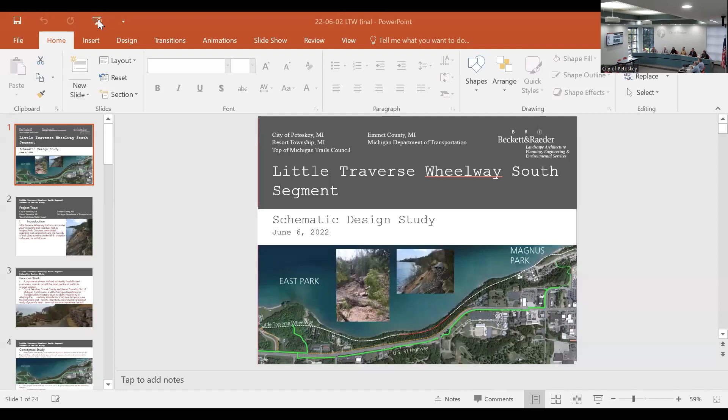Next is a presentation where we're going to hear from Beckett and Raeder concerning the Little Traverse Wheelway West Side Connector schematic design. For that, I'm going to turn it over to City Manager Al Terry. Sure, and I'll turn it over to Kendall Klingel-Smith, Parks and Rec Director, and he can start the program off, and I'm sure he'll introduce Tim Knutson from Beckett and Raeder. Well, thanks.

As you know, this has been a process that we've been going through for the last several years. In 2019, we noticed some fissures along the wheelway that we monitored in the fall. And then in April of 2020, we had the bluff collapse. We have done other studies with Baird and Associates, more of a slope failure study, to try to understand what happened.

And so we've gone through the process with the county and with Resort Township. The last assignment was to have Beckett and Raeder come up with engineer drawings and an opinion of probable costs for a route on the south side of 31. This route was identified for a few reasons. There is some trepidation to put any infrastructure back on bluffs, and that's a statewide trend we're seeing. So we wanted to have an option to explore, and we were directed by our elected officials to review this option on the south side of US 31. There's been a lot of discussion, a lot of meetings, and a lot of reasons why what you're going to see tonight is where we are.

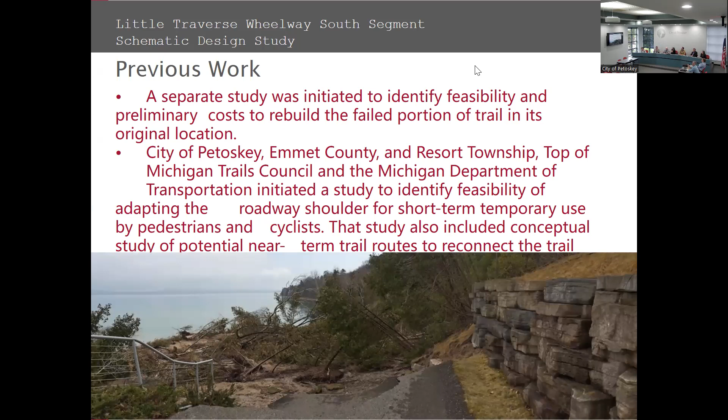So this is where this all began. We were trying to find a route in 2020, or as quickly as we could, by modifying the roadway shoulder in some fashion. During that study, we learned that the road shoulder cannot be used formally for pedestrian use. It can be used for cyclist use, but there are dimensional requirements that a road shoulder falls short of when you try to assign it to pedestrian use.

Some of those requirements get to accessibility standards, and some get to AASHTO requirements, but they all refer to safety. So we took that warning very loud and clear from MDOT that there's really no possibility to accommodate pedestrian traffic on a road shoulder.

So we moved into this study. We wanted to look at any trail we could place in an efficient manner to reconnect the wheelway from west to east around that failure. The failure section shown in the slide is the dashed red line in the very center, and the dashed white line is the wheelway.

Finding that route efficiently meant either using the route along the lake, which is covered in a separate study, or making use of the US 31 highway right-of-way to accommodate a portion or all of that trail. On the north side of the highway there's an orange dashed line representing the north US 31 highway trail route we explored.

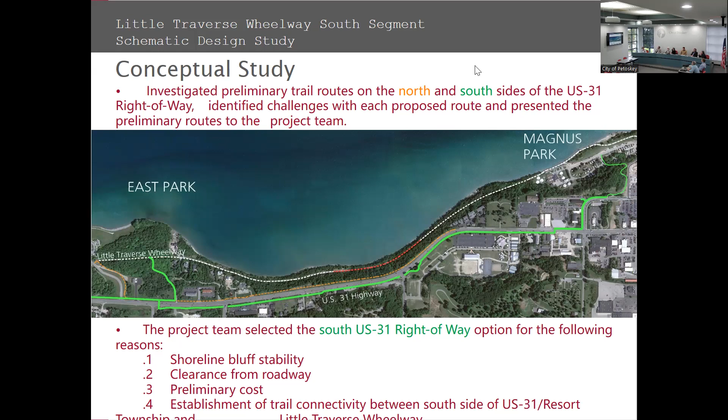One other factor that pushed us to that decision was that we would establish trail connectivity between the south side of US 31, Resort Township, and the Wheelway. So all of those businesses on the south side of 31 would have a pedestrian and cyclist connection to the Wheelway, which is a benefit. That was probably the last factor that played into the selection of this route.

So at this point, we dove into this study, which was a more detailed schematic design of what we're calling the south segment connector. So that included gathering topographic survey for the proposed trail segment, locating existing utilities within road rights of way, and making sure we consider utility replacement costs and schematic design. This was a pretty involved task, which meant getting in touch with the utility providers themselves and trying to get some mapping, type, size, location of existing utilities from them.

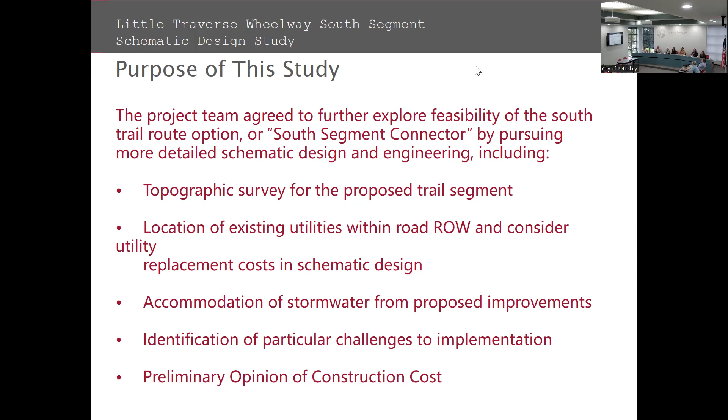We know if we modify the road shoulder to accommodate a trail, which is impervious pavement, we're going to have stormwater impacts. So we have to make sure we accommodate those stormwater impacts. And then lastly, we wanted to identify the particular challenges to implementation and most importantly, an opinion of construction cost.

So these are the design and engineering influences, or I guess guidelines and standards, that we attempted to meet. So these address minimum trail width, the distance the trail has to be from the roadway, the type of visual and tactile identification at intersections so that no matter what your ability is, you know that there's a crossing there. Clearance from the trail for trail users. We want to make sure we don't surpass steepnesses with regard to longitudinal, but also cross slopes and our crosswalk locations. I'll mention that a little bit more later.

AASHTO, which is the Guide for Development of Bicycle Facilities and the Guide for Planning, Design, and Operation of Pedestrian Facilities, were taken in combination as design standards for the trail. And then importantly, the Americans with Disabilities Act, which will identify our maximum cross slopes, our maximum longitudinal slopes, and other elements of the trail that have to be met to meet accessibility. And then lastly, adhering to MDOT's design and engineering standards, which also happen to include the AASHTO and the ADA accessibility guidelines.

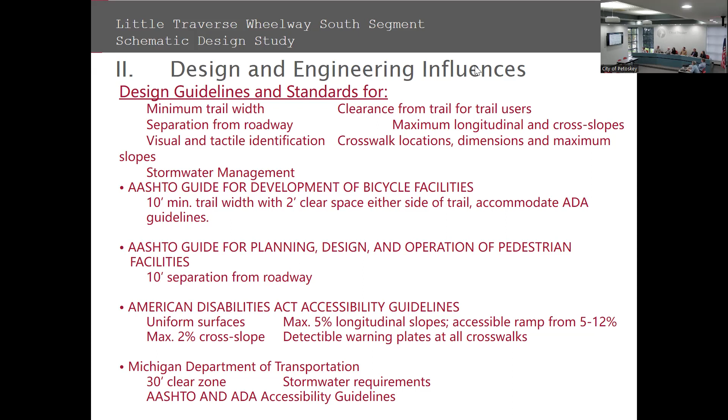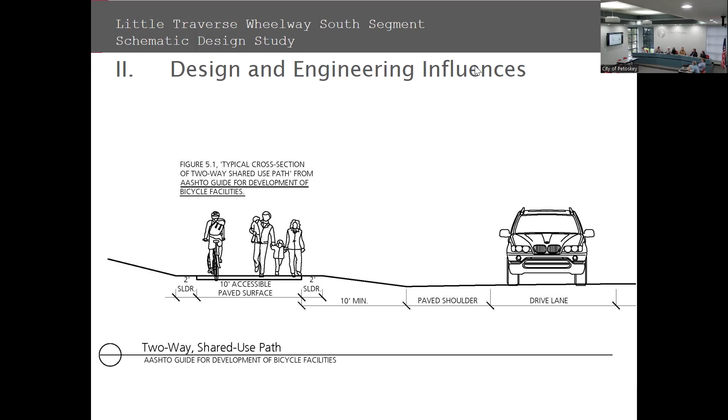So this is a really quick snapshot of what that trail looks like next to a roadway. So you can see the vehicle to the right is in the drive lane. Then we have a paved shoulder. Then we have a minimum 10 feet of separation from the edge of that pavement to the trail surface. Once we get to the trail surface, we have to have 10 feet of trail width, no greater than 2% cross slope, but also have to have a 2-foot shoulder on either side with no vertical obstruction. So for example, somebody can't catch a handlebar if they're cycling along that edge, if it's 2 feet clear space beyond the edge of the trail. So that's a quick picture of the guidelines we use.

So in the study, our next chapter was design narrative, and I'm not going to walk you through the narrative for all 8 sheets because that would be a pretty exhaustive exercise. But if you pick up the study, this will show you sort of a snapshot of what you'll see if you do. So we basically utilized the topo survey that we received in AutoCAD and designed to that plan. Pulled existing utilities in from utility providers, referred to previous MDOT construction drawings from 2015 and some regional GIS info, regional drainage patterns so that we get a grip on our stormwater impacts, and prepared a set of schematic design plans and representative cross sections.

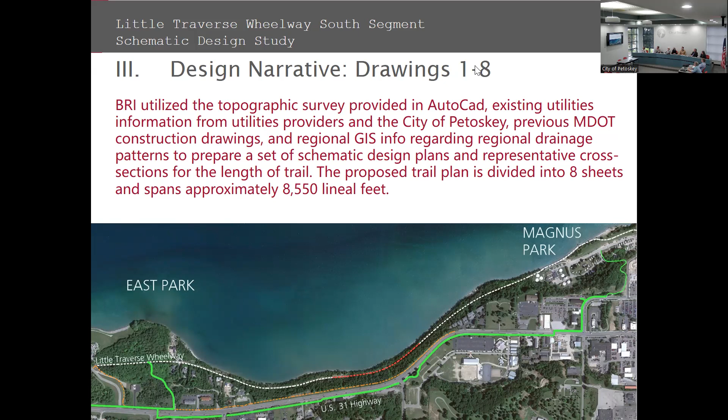So for that length of trail that you see in green, we ended up with 8 drawing sheets. Each drawing sheet had 2 sections of trail on it, so really 16 different sections of trail, and we're just identifying them 1 through 8. Each drawing in the design narrative gets its own page, and if we go to the next slide, we start out with an aerial vision of what that trail segment is. So this, for example, is trail segment 2. This will be the second trail segment from East Park. And the reason I chose to show this one to you is because this is where the proposed tunnel crossing would take place. This is the only location along the roadway where we have the difference in elevation between the base of the shoulder and the top of the road to pass a tunnel beneath that roadway.

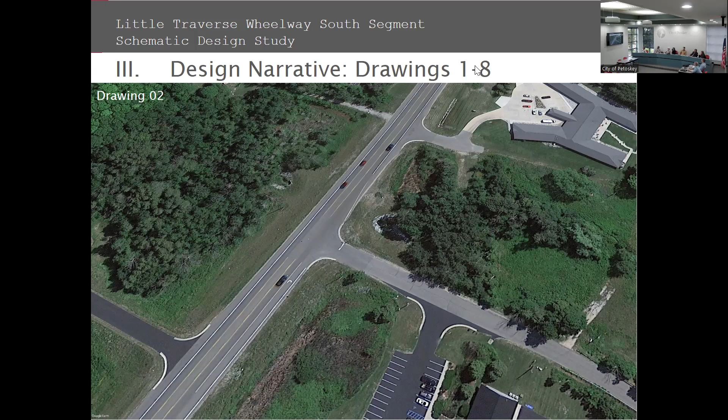So we start out the narrative with an aerial image to orient people with regard to where they're located. And then if you go to the next slide, excuse me, you should see the design narrative. And again, I won't take your time by reading all of this narrative. Some of them are longer than others, but at the bottom of the narrative, it also identifies the primary challenges with regard to that trail segment. So if we go to the next slide, there is our drawing sheet. I think I told you for each drawing, we have 2 sets of trails, top and bottom, but for this drawing, we showed it at a much larger scale and just showed 1 section of trail because we wanted to be able to show the tunnel crossing in more detail.

So if you're looking at the top left of the sheet, you would imagine yourself following that trail, which is bordered by those two heavy gray lines, and that would descend downhill in the form of a ramp till it reached tunnel elevation. You would make a right turn towards the road, pass underneath the tunnel. This tunnel is dimensioned to meet the same dimensions as the tunnel at Bayfront Park. Once you were underneath and cross the road, you would make a right turn, and then likewise progress uphill up a series of accessible ramps until you were back to sidewalk grade.

Now, there are a couple of other things happening in this slide that aren't maybe immediately apparent, but that really drive the cost and the complexity of this project, and particularly the tunnel. So really quickly, there are a number of utilities that pass through the site and through where the tunnel is. In other words, underneath the roadway, the most significant of which is an 18-inch water main. So we have to move that water main, but we know we have to move it outside the influence of the tunnel and the roadway.

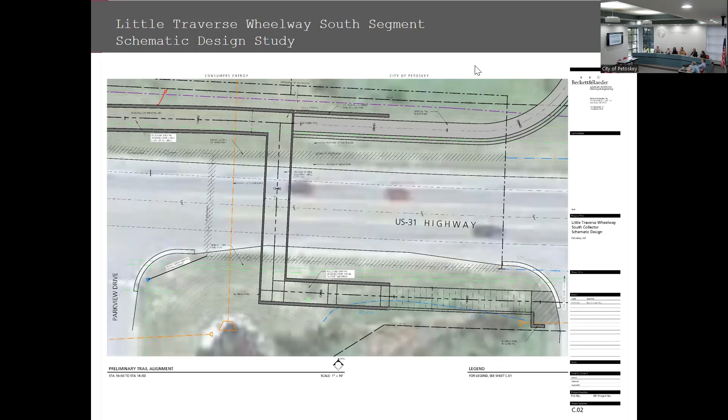So each drawing has at least one, and in many cases more than one, representative cross section that describes maybe more easily and more visually what the challenges are, whether it's this circumstance or a steep swale that we have to fill to place the trail, or maybe utilities that we have to move to place the trail. We had to cut sections like this to tell us what was going on and how to respond properly. So as I said, each drawing should have a set of representative sections going along with it.

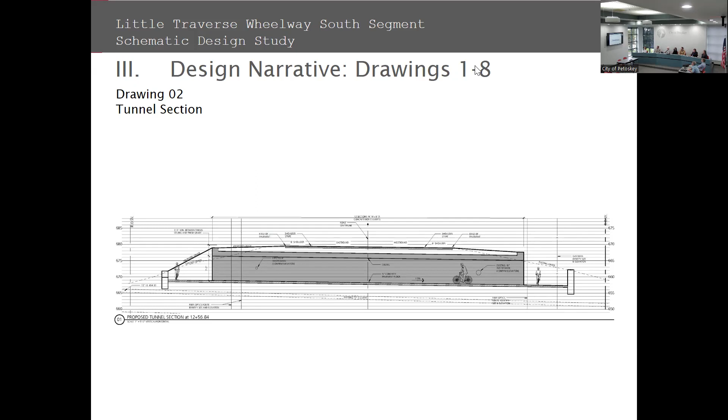So just a summary of design and engineering challenges we encountered, most of which we anticipated, mainly the tunnel crossing, the proposed retaining walls and clearance to roadway. We need to maintain 30 feet of clear zone. We have that in most places. There are one or two changes that we can make to make that happen everywhere. So that's not a big concern. We know we can get 3 feet 5-inch minimum depth of cover from the tunnel ceiling to the finished roadway grade. We've achieved that. We've protected that existing 72-inch storm sewer, which crosses the road just west of the tunnel location, from any impact. And we've proposed rerouting utilities over and under the tunnel and ramp structures.

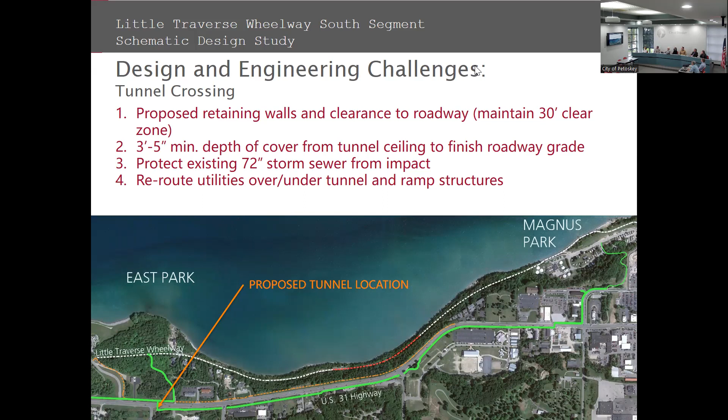So that graphic there shows you the location of the entire proposed trail and where that tunnel crossing is proposed itself, just east of Parkview. I believe that's Parkview Drive. Next slide, please. So with regard to existing utilities, most of the challenge is created at that location where you have to place the tunnel.

But there is also a significant drainage swale east of the tunnel crossing in front of what I'll call the hotel district. Most of you familiar with that drive notice, coming in from the west, how pronounced that swale is. We had two options there. One was to place the trail on an embankment and hold it up with a retaining wall. The other option was to cut into the slope and place the trail, both to try to get a level surface. But the former would come with significant cost with regard to the retaining wall. The latter would come with significant costs regarding replacing the utilities that we would encounter.

So a third choice was made to fill that drainage swale, to place the stormwater that occupies it underground, and to create a more level surface for that trail and make that really pronounced swale go away. This was a decision that MDOT was in agreement with, so fully supported by MDOT. But what that does mean is the cost to not only fill that swale, but to place storm sewer within it so that we are carrying the stormwater and not leaving it in a flat situation, but conducting it to where it needs to go. So stormwater system redesign and the pipe and structures that go into converting that swale to a storm sewer assembly carried significant costs.

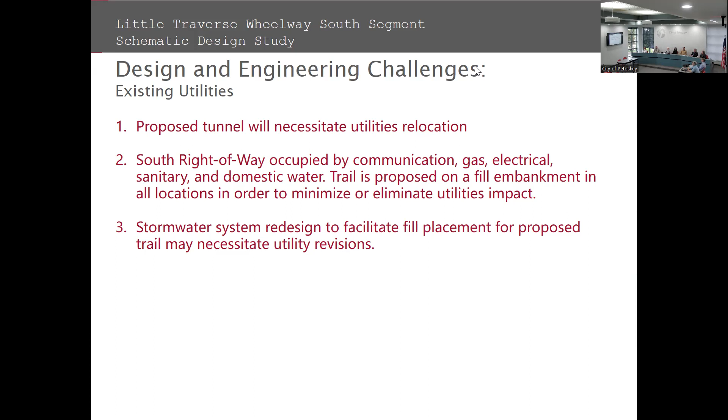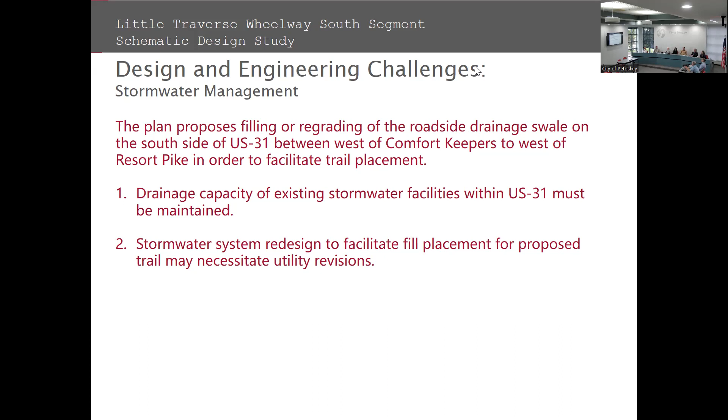Yeah, so just to detail this a little bit more, we can't just place pipe any size. We have to make sure that it's going to accommodate, meet, or exceed what that swale is carrying right now, which means we have to determine what drains into it, which, if we go to the next slide, can give you a pretty good idea of the drainage area that contributes to that section of roadway. So we're going way back beyond Sheridan Road in some cases, not so far on Resort Pike, but that's the area that contributes to stormwater runoff, whether via surface or underground, to that road shoulder. So that gives you an idea as to why that swale is so deep and pronounced right now.

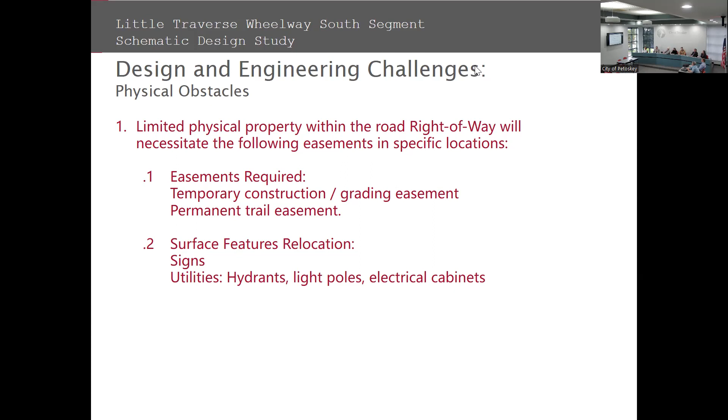Another design and engineering challenge were physical obstacles. The biggest one is probably the instance I mentioned regarding the tunnel and the presence of utilities within the roadway that pushes us to install that reroute of the water main outside of the right of way, which necessitates an easement. And we know those easements will probably come at a significant cost. Other physical obstacles can be relocated within the right of way, but still come at cost. So we're talking about fire hydrants, light poles, electrical cabinets. There are 2 business signs within the road right of way that we would also have to remove and reconstruct.

Okay, so this one is a really big challenge: our driveway and roadway crossings. Most of you know that the roadways that meet US 31 coming from the south come down a pretty significant slope, and in a lot of instances that slope carries right down to US 31 itself. When we create a roadway crossing, we really have to try to adhere to the Disabilities Act, which asks us to maintain a 2% cross slope or less. In most cases, the crosswalks we encountered were 3 to 10%. Talking to MDOT, there are some instances where they acknowledge we just can't adhere to ADA everywhere because we have physical challenges that are insurmountable, like topography. But there are some things we can do to relax these slopes, but they involve removing a larger section of driveway, flattening out where the trail portion crosses, and then steepening the other section. So you create maybe a minor speed hump there when you do so.

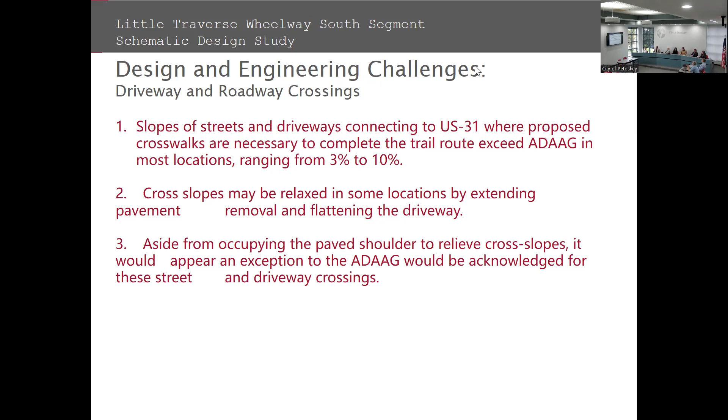At the second to last section of the study is our preliminary opinion of construction costs. This identifies all preliminary costs associated with everything to build and complete the project, including final design, engineering, bidding, construction, and project completion.

We completed the estimate using quantities measured from the AutoCAD survey and drawing. So what we have is schematic design, sort of a final design light, but it's scalable. It was completed on an AutoCAD survey, so it's really convenient to measure quantities from that.

And then we used unit costs applied from the most recent bid information, including recent bid results. We got some really valuable input from City of Petoskey DPW, and some information regarding MDOT bid costs.

Also included in the costs are contractor general conditions, design and engineering fees, geotechnical investigation, which will inform things like the final pavement section and establish other field standards for construction, construction contingency, and partial topographic survey.

So we know we have survey from East Park all the way to Emmet Street. And then we included a factor for market conditions in the estimate, since costs right now are particularly volatile.

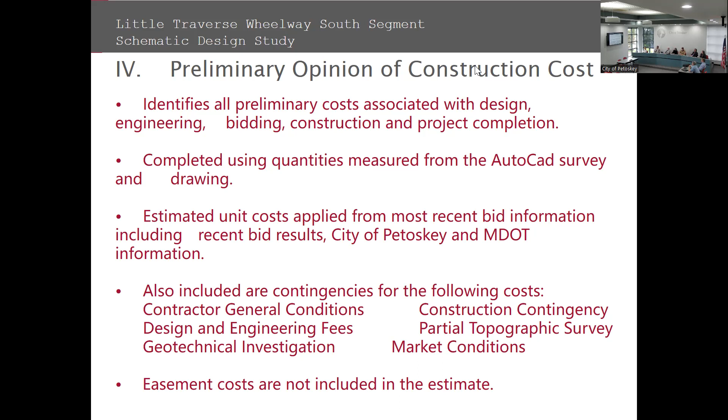So I can show you the estimate now, if we go to the next slide. Our subtotal for the entire trail is about 6.5 million.

There's another number at the bottom there, identified as the alternate East Park connector. This is an optional trail route that would shorten the trail such that it would begin just east of East Park and connect. There's a bridge within East Park that you cross, and we would connect just east of that bridge crossing.

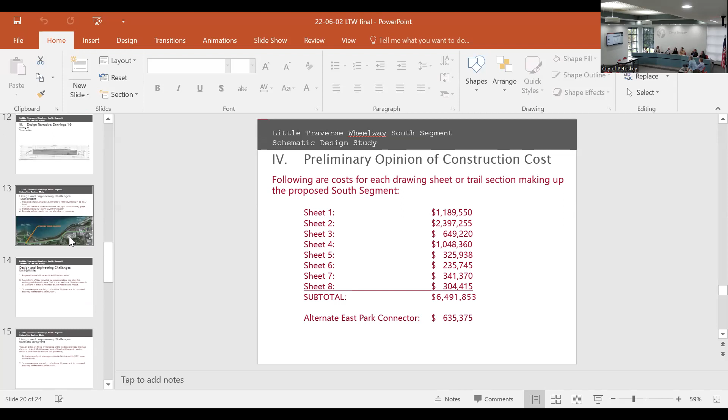Could you go back to the map and show people? That would probably be helpful. Oh, you had it right there. Was it right there? This one. Which, was it earlier? Yeah, it was, no, a little bit more, right there. Yep. Thank you. Oh, it's okay, you got it, it's good.

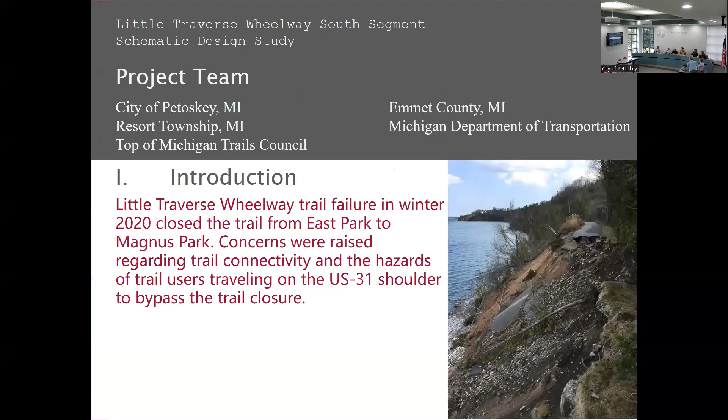So if we can go back to that estimate summary, those sheet numbers, sheet 1 through 8, pertain to the actual drawing sheets in the study. So you can look at the study and see at a glance that sheet 2 is particularly expensive—that's our tunnel crossing. But if you look at the study drawing itself, you can also pick out things that contribute to the cost, which are also covered in that written summary on the first page.

Are you sending these to council? Because I have not seen any of this until now. No, I'll send the study itself. Tonight we just wanted to summarize the study and what went into it and what you could find, but we'll send a full copy to Kendall so you guys have it all to review.

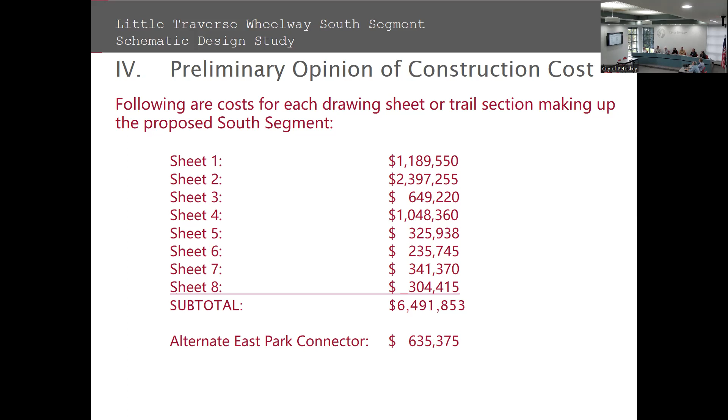So if we go to the next slide, please. Lastly, we wanted to offer a conclusion in our study. Again, our charge was to determine the feasibility of a trail route to reconnect the Wheelway in a more near-term manner, and so this is what we found.

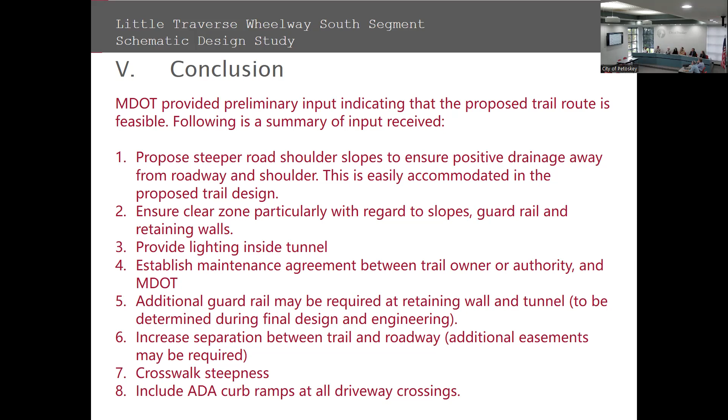These are some elements that MDOT recommended. They're all fairly easy to achieve, and I can review them if you like, but I'd really like to skip ahead to the next page.

So these are the conclusions our office has to offer from the study. First, the south segment is conceptually feasible from a design and engineering standpoint. The south segment may be the best near-term possibility to bypass the collapsed segment of Wheelway, and it may also realize additional non-motorized transportation benefits in the process—those connections on the south side of 31, and modification of the existing sidewalk to convert it from a 6-foot wide sidewalk to a 10-foot wide non-motorized trail.

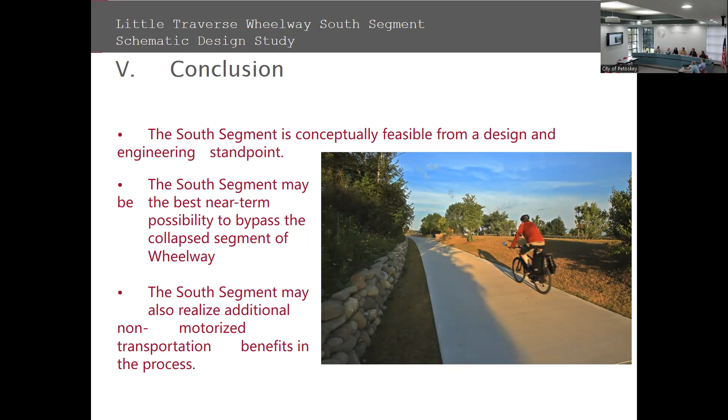Lastly, most non-motorized trails represent a combination of transportation and recreational facilities, one or the other prioritized depending on the location, route, and intended user. We probably all have our own opinions, but would agree there's a significant prioritization of recreation with regard to the Wheelway.

You get some spectacular views. It takes you by some really neat locations. If it were prioritizing transportation, it probably would be up on the roadway, paralleling the roadway itself.

The south segment would reprioritize that section for transportation, but it presents compromises with regard to trail design guidelines. We know we will be asking for relief from at least some of the requirements regarding cross slopes at some driveways. And we know the south segment will probably fall short of offering the recreational benefits and exposure to the region's natural assets that the Miracle Mile presents.

So as we conclude, Kendall had mentioned a separate study had been commissioned to identify preliminary design, engineering, and construction costs to replace the trail down below in its original location. We would recommend comparing those costs, the feasibility of that installation, and the quality of the two options, and what priorities are desired, whether transportation or recreation, before selecting an option.

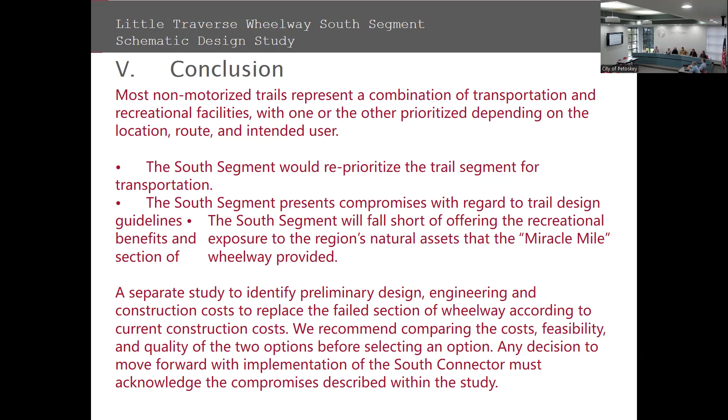So that's the presentation I had for tonight. Again, just intended to summarize the study, but can I answer any questions?

We'll go to council first. So council, do you have any questions? Ms. Demore? Hello, thank you for that.

I heard you say something, so let me clarify that first. When you were talking, you said something about bluff stability that MDOT may or may not share that perspective. Can you kind of explain to me what you meant by that?

Sure. So we tried to base a lot of our design decisions on what MDOT is doing with regard to the roadway, because theoretically they have to contend with the bluff also. Theoretically, it's presenting a threat to them.

When we broached the possibility of placing the trail on the north side of the roadway, we received a lot more pushback from MDOT regarding things like, we can't guarantee that it's going to last in that location.

But when we asked them if they were really concerned, if they were studying the bluff and preparing to address a situation should it arise, the only information we got back was that there is a monitor at the Eppler curve, right across the street from that intersection, that monitors the movement of that bluff. But there's nothing other than that in place.

So I guess it's an open question as to whether we should be looking further west along the trail. But if you walk the trail itself, it's pretty obvious that there's some movement much further west than where that failure took place.

I don't want to speak for MDOT. They've been a great ally on this project, but I think they're trying to kind of couch their response and coax us towards a south side trail position, but falling short of saying, if you place it on the south side, we can guarantee it'll stay there.

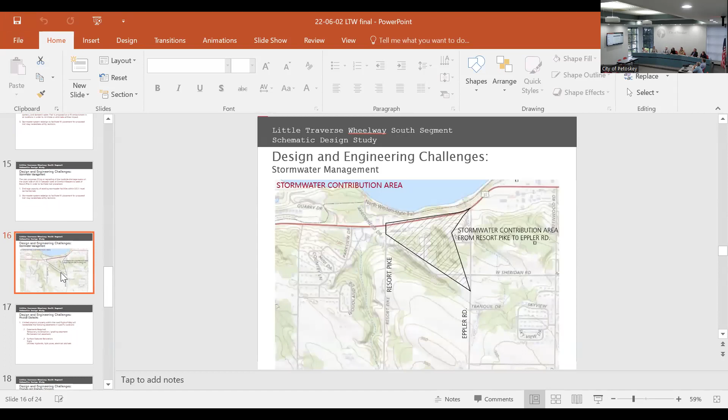Ms. Walker: Thank you, Tim, for the presentation. Could you go back to the stormwater swale area? Would you please go back to the stormwater swale area, that slide that you had that showed that swale between Eppler Road and Resort Pike Road? Yes, that's it. Thank you. No problem.

So you said you've also done some partial topographic surveys. My concern since day one, since the trail fell into Lake Michigan, was that the Eppler Road swale, the movement of water from Eppler Road to the south, coming down Eppler Road and crossing into the bay, is exactly where the compromised area happened. And Emmet County, Resort Township, and the city of Petoskey, in their improvements at Greenwood Cemetery, completely deforested that western section of the property at Eppler Road. So who is to say that the falling in of the bike path into Lake Michigan isn't a result of the flow of water happening with such great force from Eppler Road, and potentially from what was an area where the roots were retaining the soil and managing the water. When you deforest something and plant grass seed and sand or topsoil, you lose the ability to contain and manage that water. So I am still of the theory, whatever it's worth, that had something to do with the compromise of that bike path.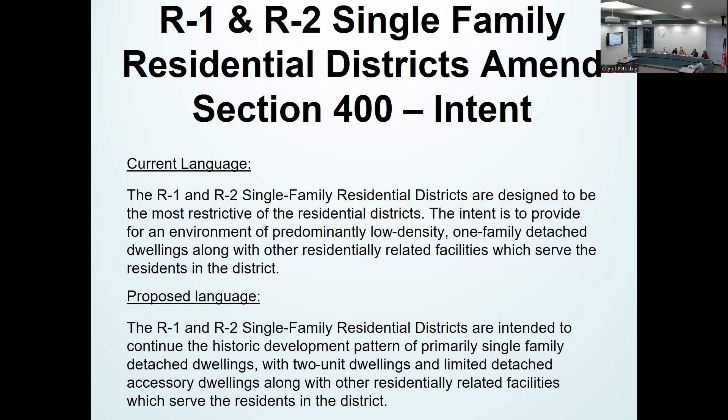Zach, let's move to number 2. So under 1C, the current language reads: the dwelling unit shall have a minimum exterior width of 24 feet and a minimum depth of 24 feet. Attached garages shall not be included in width or depth measurements.

I think the intent here is to not be so restrictive and just say, let's have it at 600 square feet. There are a lot of different lot sizes and shapes that could allow for an accessory dwelling unit, but it might not be 24 feet. It might be longer, it might be shorter, it could go up. There are other options, and this kind of allows us to remove that restriction.

So basically, if you multiply it out, it's at 576. So basically all we're saying is we're rounding it off—instead of 700 and whatever, or 500, we're going to 600. That gives it more options for dimensions.

Any problems with that? Any concerns, Mr. Shields? Did the county lower their minimum dwelling size square footage? Do we know what that is, and why not just go with that? The county has been tweaking their language as well. I know one of the big things is that they allow their accessory dwelling units to be mobile homes.

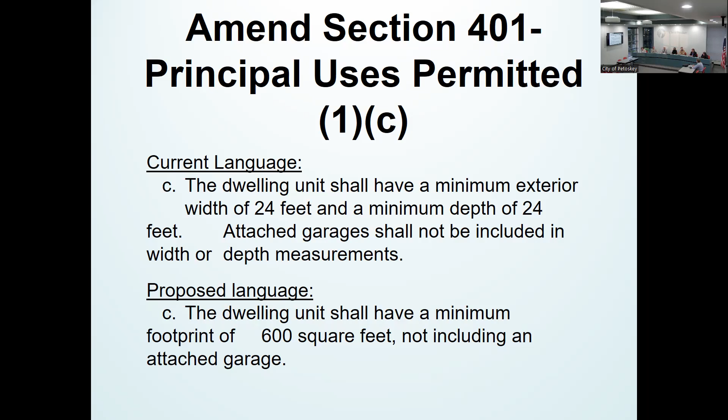We're moving on, we're going now to item 3. So this one's, yeah, a bit longer. These are helping to add to those restrictions and really help define the situation here. Currently, the zoning ordinance doesn't have any sort of, I guess, restriction. This helps to kind of shape that. So they're still falling under bulk requirements as far as there's setbacks, there's height limiting, things like that.

Then going on to B, a 2-family dwelling shall meet parking requirements. So parking requirements are still an aspect there to be met. Part C, it says 2-family attached dwellings shall be architecturally compatible in size and character with the surrounding neighborhood. So avoiding super chic glass buildings as well as mobile homes, things like that. It's on both ends of the spectrum there.

Part D says a two-family dwelling shall not allow a garage to protrude beyond the front building plane. Again, that's just to help with the setback issues and with the character of the neighborhood as well. Is that the same as a single family home, that garage cannot protrude beyond the building plane? So this is under two-family attached dwellings. Okay.

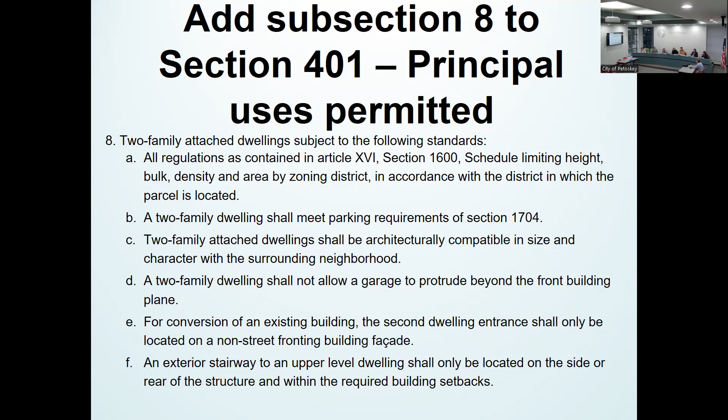All right, let's move on to section 9, subsection 9. This is a long one as well. This is a two-part slide here. So I'll just kind of read through. So it says 1 detached accessory dwelling unit is allowed per residential lot, subject to staff review and approval that the following standards are met. So this is all new language as well. So A says an ADU is permitted on a parcel that has 1 single family dwelling as the permitted principal use.

I think we should just go one by one here. So everybody good with that one? We want to discuss? My questions are broad, so I'll just hold till the end. Okay. If that's okay. Okay. Part B says the property owner shall occupy either the ADU or the single family dwelling on the property except for temporary absences not to exceed a combined total of 6 months in a calendar year and be the primary residence of the property owner.

Tina, I think this kind of goes back to your question earlier on the diversity and the different kinds of units and allowing affordability. So maybe the owner doesn't necessarily have to occupy the primary residence. They could occupy the ADU as well. So just adding to the diversity. So any questions on that one? C says an ADU shall not exceed 600 square feet.

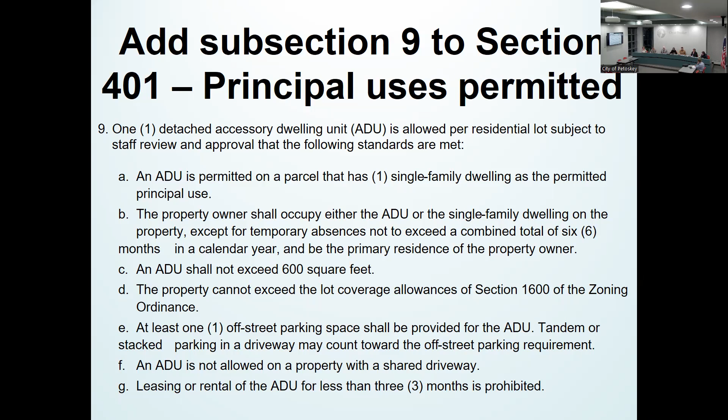Discussion of the Darling Lot design guidelines as presented by the Walker Parking Consultants. Who do I call on? Call on me. Mr. Altieri. Sure, we had our joint meeting there, we looked at the Darling Lot presentation by Walker Parking Consultants. And in that meeting, the consultant was looking at 3 specific areas that we'd like to get more input on from the city as far as what you'd like to see in designs going forward. And I put them down, I guess they're up on the screen too.

The items include the type of deck you would have. And if it would be a covered deck, and if it's a covered deck, would there be solar panels or would there be a green roof? Also, what level of architectural exterior you'd like to have, like a low, medium, high type architectural, so high end, low end, middle of the road. And then also the parking spaces, whether they should be perpendicular or angled. So those were the 3 things he was looking to get input on from council.

And as far as the next step, since we didn't meet with the board, if the council wanted to come up with what you feel those items should be, and the council present that to the DMB for their discussions. But that's up for you to decide. It should go through the planning commission as well, shouldn't it? I do not think so. Not as far as this goes, right? The plan will eventually go to the planning commission, but I don't think the design elements at this point will need to go through the planning commission, but the plan will. Correct. Okay. Also, do you wish to give Mr. Altieri some feedback on this?

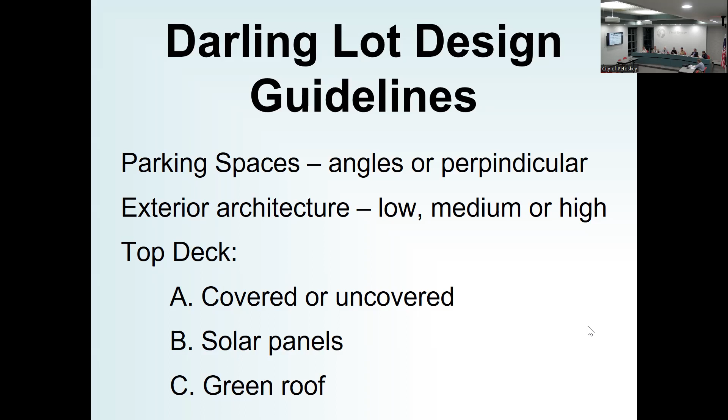Yeah, that's kind of about my impending departure here in September from the city. I was wanting to try to keep moving forward with the filling of my position, and I was looking at — as this was discussed about a year ago when this was coming up — there was a discussion about splitting those two positions.

And as much as I hate to see it done, because I think it works that way, just the way things are now, it's not going to happen. So I think it's a good idea to split that position.

Leave the director of finance treasurer as one position and the clerk as a separate position. And in order to get that process of the hiring process going, so that when Mr. Horn comes in, the brochures and the ads are already out there, so we can get this process going.

And then, of course, all that process will take place once he gets here, as far as reviewing applications and filling the position. I was looking at having city council split the positions, and then with the clerk position being assigned or appointed to the finance supervisor position.

And the clerk position, which largely entails elections, entails a lot of staff time, which includes the finance staff time, as well as Sarah Beck.

But it's all city staff within the finance side that is either working on it, or if you're not working on it, then you're covering the people who are working on it. So to me, it should be a city finance staff person who has that position. That's why I recommend that.